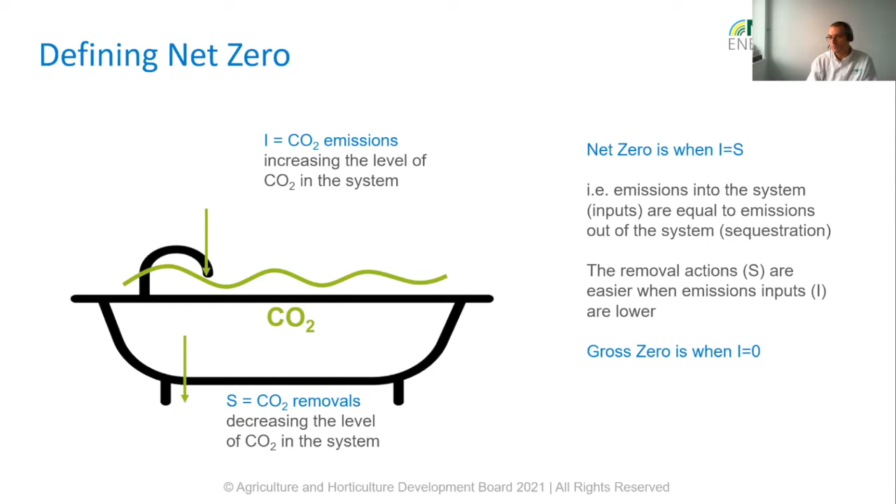So as part of the announcement that was made by the NFU, my policy colleagues (I don't work in policy at all, I work in sort of grassroots consultancy, helping people make actions) have quantified where agricultural emission sources are.

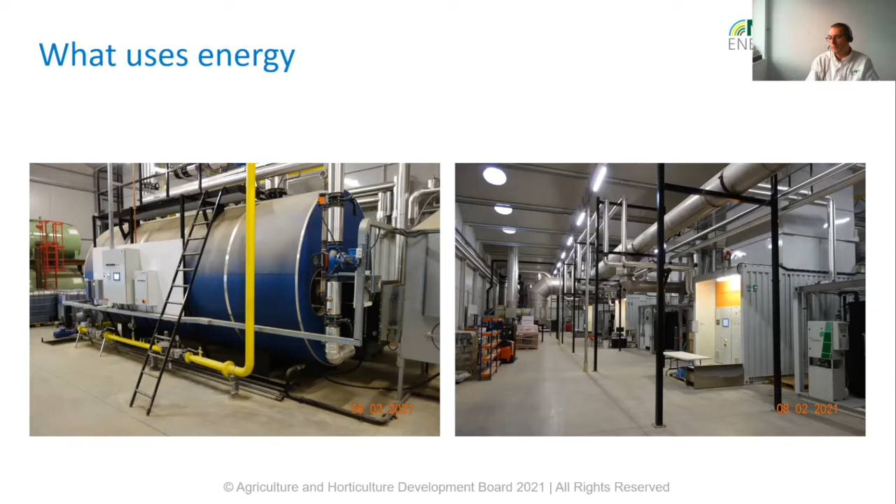So yes, most energy in horticulture goes into heating the glasshouses and in boilers and in CHP plant. Typically, if you have a CHP plant, you're probably doing a lit crop as well. So you've got lights, and you're doing that to create out-of-season produce. And out-of-season produce for the supermarkets means being able to sell tomatoes in December at Christmas time, so people can have a salad with their Christmas tea.

And so, if you've got combined heat and power, you're making electricity as well as heat, then that becomes really important if you're going to think about a lit crop, because you want to avoid mains electricity costs. And CHP has been an economic way of doing that, because you could buy gas at 3 or 4 pence a kilowatt hour and make electricity that was then valued at 6 or 7 pence a kilowatt hour, compared to mains electricity at 12 or 13 pence a kilowatt hour, and you could avoid significant mains electricity costs in that way.

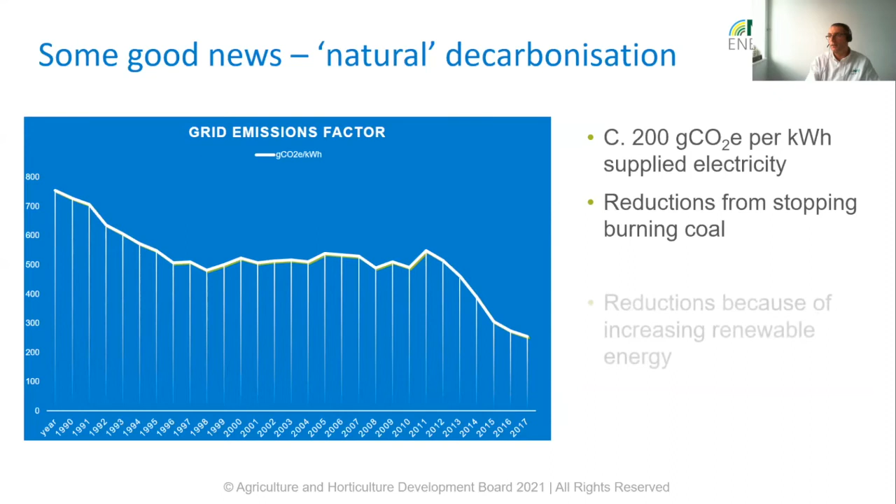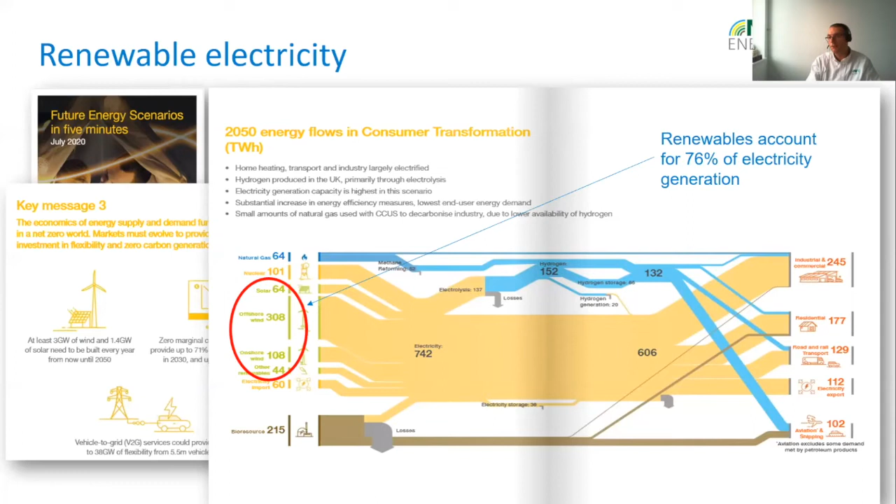And that's really great news where you're going to be using renewable electricity in the future, because the National Grid produces these future energy scenarios, and they reckon that we're going to decarbonise even further. By 2050, renewables alone are going to allow for 76% of our electricity generation, let alone low carbon sources of nuclear and maybe electricity import as well. So it is really going to reduce those carbon emissions in electricity by a considerable amount.

On the heating fuels, of course, there's less good news. Gas and oil heating fuels generally have around 200 grams of CO2 per kilowatt hour in them. This is an inalienable truth, and we don't think that's going to change very much. We've heard a bit about biomethane today going into avoiding transport emissions or off-road tractor emissions. But there's also talk about putting biomethane into the natural gas network to decarbonise that. But the government's ambition is pretty small in that regard, and if we hit 10% of the total gas being produced by biomethane, I'll be surprised.

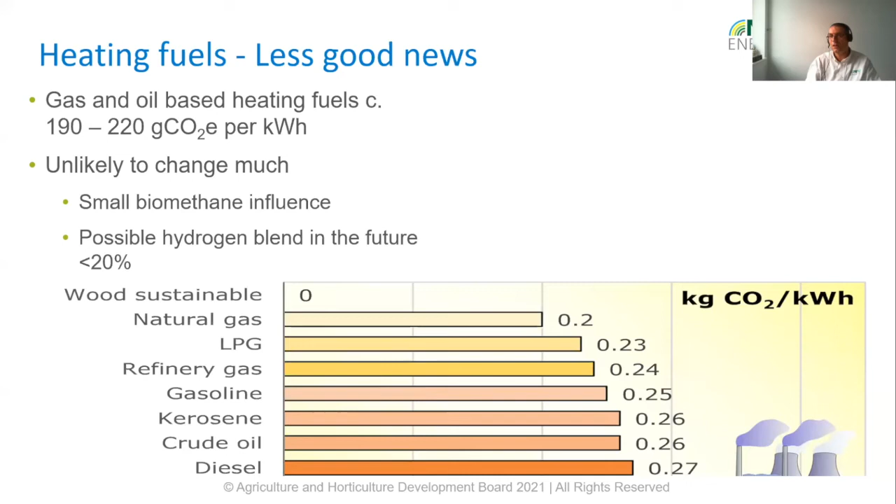And then there's talk about hydrogen blending in the future, up to maybe 20% in our natural gas network. So our natural gas network will decarbonise a bit, but it's unlikely to have the very big impact of decarbonisation that has already been had on the electricity industry. So if we're going to think about heating, we have to think about alternative heating sources, not about waiting for the grids to decarbonise themselves. So what else can we do? Can we put alternative fuels into CHP? Can we think about heat pumps in a more intensive way, and maybe some sort of bioenergy systems?

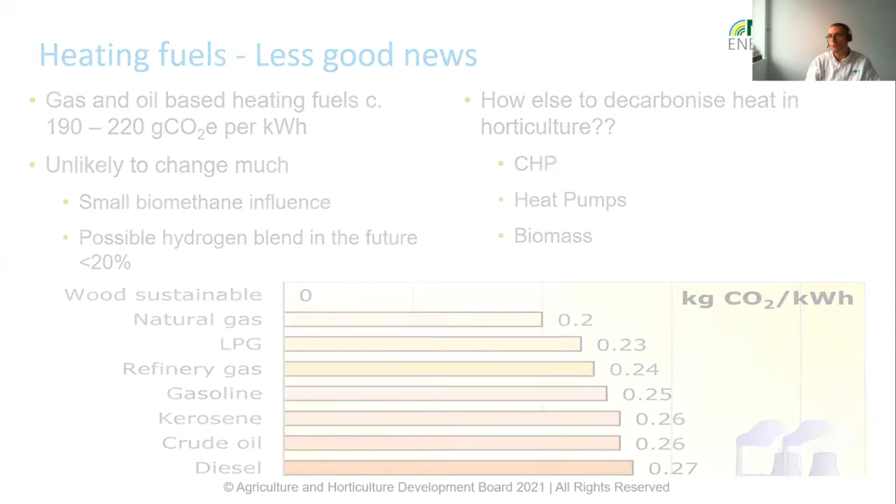Again, heat pumps are a pillar of one of the government's strategies to decarbonise heat in total in the UK, mostly centred around domestic heat pumps, of course, and we've had some announcements in recent days as to how they might increase the number of heat pumps used in domestic heating. And of course, some simple numbers show you that the decarbonising works in that regard.

Sorry, I just skipped too quickly forward, expected something else to build.

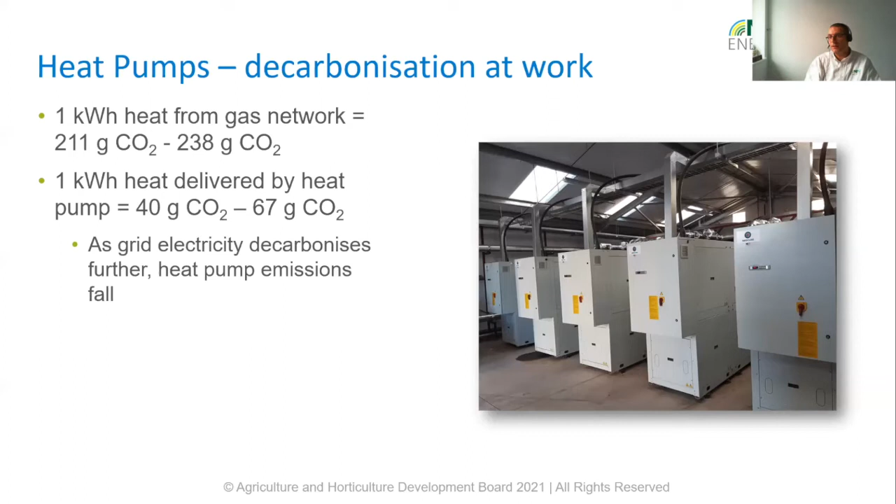In terms of delivering a kilowatt hour of heat from a heat pump, it's considerably less, to about a fifth, compared to delivering it from the gas network. And of course, as grid electricity emissions get less, that will fall even further. So let's see that at work in terms of our previous graphs. Suddenly you're at 2050 predicted emissions factors for electricity and for gas.

And I may not even have been optimistic enough about the electricity. It might even be near zero in terms of its grams per kilowatt hour. We can see that going to a heat pump system or biomass and mains electricity will reduce our carbon emissions to less than 1,000 tonnes compared to the 12,500 we're at at the moment.

It's interesting to look at the graph for this, the line for the CHP, and of course CHP shows the situation getting worse, because if that's based on running mains gas through your CHP, then it's making electricity that is more polluting than the electricity that it's seeking to avoid on the electricity network, and therefore you get a negative credit for that. And you are increasing your emissions by keeping with CHP, even an efficient CHP, in commercial horticulture in time. So not a long-term strategy.

So what we see in commercial horticulture really is that the decarbonising of the heat side is the most important part. And the picture there is an article about that greenhouse that I've already mentioned a couple of times. It's using waste heat from the sewage treatment works at a very modest temperature and using heat pumps to boost it to temperatures that are palatable within the glasshouse.

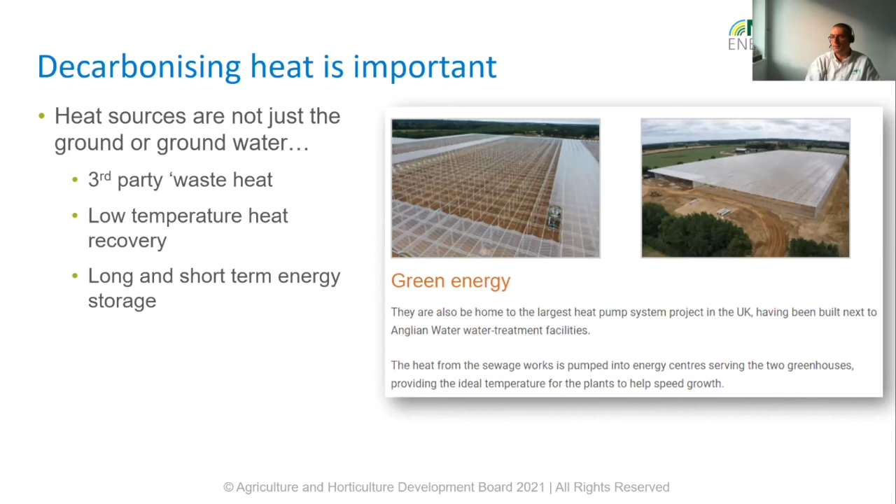I do think bioenergy has a really important part to play. Just because the RHI has disappeared doesn't mean that it's not a sensible thing to invest in terms of biomass or other forms of bioenergy. Even if it is a transition system into something else, it is a way of reducing your carbon emissions relatively quickly in energy terms. Albeit it comes with that caveat of making sure you're not making the situation worse, and ensuring that you maintain and abide by your environmental permitting legislation.

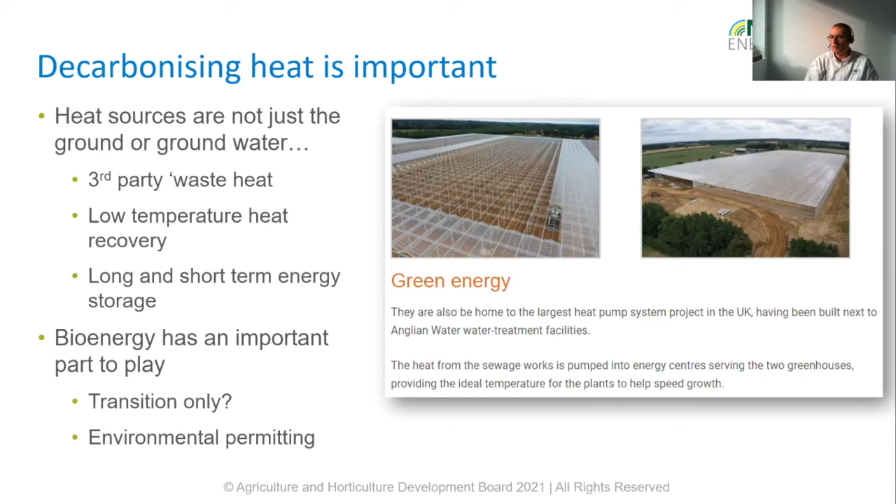And just to give you a flavour for that, that is the plant room of that very large glasshouse that's been built. A considerable amount of heat pumps. There's 16 of those heat pumps that you can see in those left-hand pictures, and some very large pipes of lots of water flowing around the system. So when you're investing in very large scale heat recovery through heat pumps, the space considerations for plant rooms and the amount of water at low temperature you have to move around become not inconsiderable.

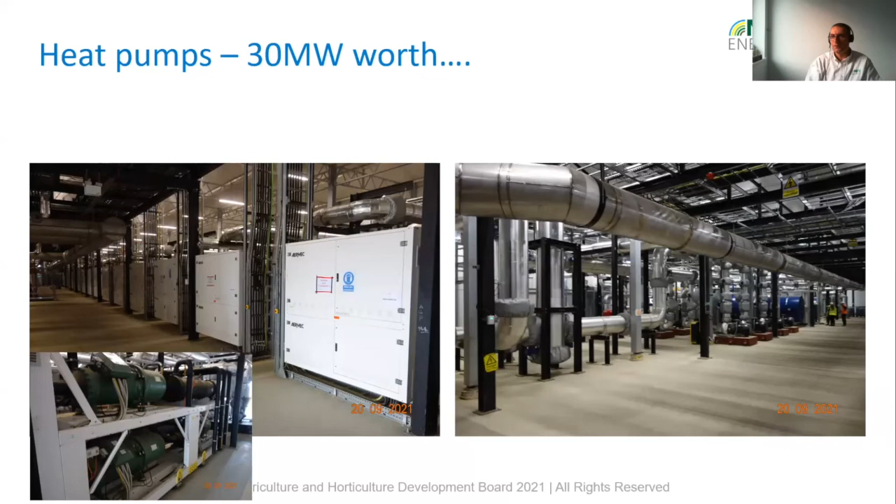Just to talk about a couple of projects that we're involved in, we've recognised the issues that horticulture are coming up against, and that need for getting heat from other places, alongside an organisation called District Heating that have come at it from a different angle and seen the amount of what they call waste heat that is being emitted from industrial suppliers, and wondering whether we can match that into horticulture in order to benefit both sides of the coin.

So we've just landed an Innovate UK project to research this in more depth and to create a matching system to try and prove that commercial horticulture could benefit from some of this heat that is being emitted elsewhere. Now that might involve some pretty large compromises. You might have to move some factories, you might have to move some glasshouses in order to make sure that the movement of heat is palatable. And of course, we mustn't forget CO2 in this as well. If we can move horticulture to places where heat and CO2 are available or vice versa, then clearly we can benefit from that too.

One other project I think was worth mentioning, because there was a chat question earlier through Benjamin's presentation about capturing methane directly out of animal buildings. We're also involved in an Innovate UK project that is looking at how you might capture that methane through some sort of passive system hung up in the apex roof of a cubicle shed to reduce those methane emissions at source.

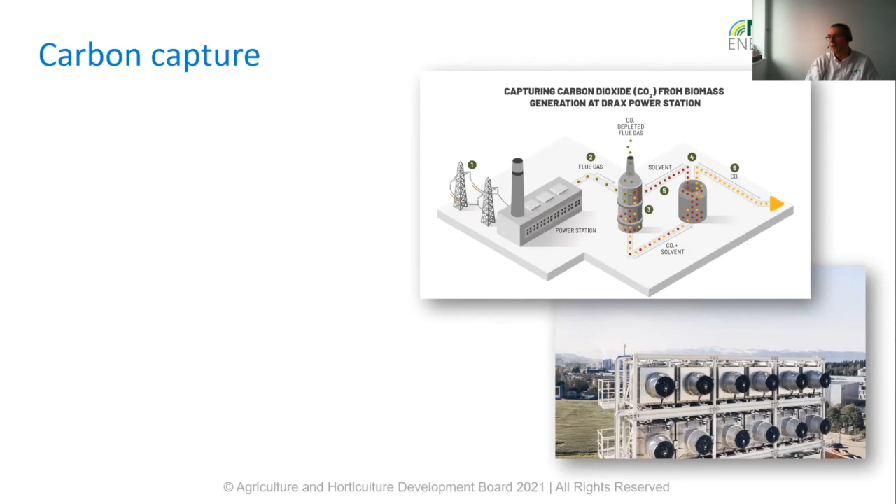And as I said, horticulture requires CO2 for enrichment. Maybe we can use those technologies to provide an alternative source of CO2 where combustion CO2 is no longer available. Whether that's from direct air capture, as in those big fans at the bottom, or whether we are taking it at more concentrated levels, such as out of power stations, such as DRAX, remains to be seen. But I would imagine it's easier, and more cost effective and efficient, to take it from the DRAX situation than it would be to take it from direct air capture. But we will benefit from that investment in that technology in horticulture, and we will see ways of using that CO2 and moving it around the country in the way that we do at the moment.

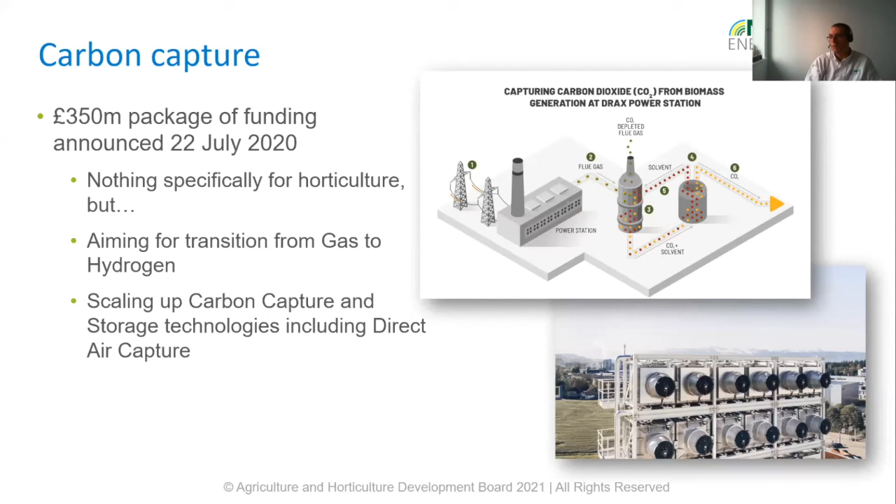Okay, just taking the last sum up slides then. It's all about actions that we can take right now. As I said, 2030 is only 8 years away, 2040 is only 18 years away. And if you think about the advancements in technology over the last 8 or 18 years, we're going to have to take far bigger, considerable strides towards net zero than maybe we have done already. And so we do need to think about strategies to reduce our carbon footprint and our impact right now.

And most people are thinking in terms of buying their way out of the situation, buying offsets, using green electricity, green gas, or somehow taking energy from renewable sources. But my call to arms is we need to concentrate on the efficiency side of things as well. Make sure that we reduce our consumption considerably before we then start to think about renewable energy or even reusing our resources in the way that we have, and keep ourselves prepared for the future.

Our glass house of the future may not be a glass house. It may be a vertical farm. It may be a closed and sealed box. It may be that electric light becomes far cheaper than the mains powered heat. And therefore it's more palatable to think about our growing in a very, very different way. So preparing for the future is going to be really important. And I shall leave it there.